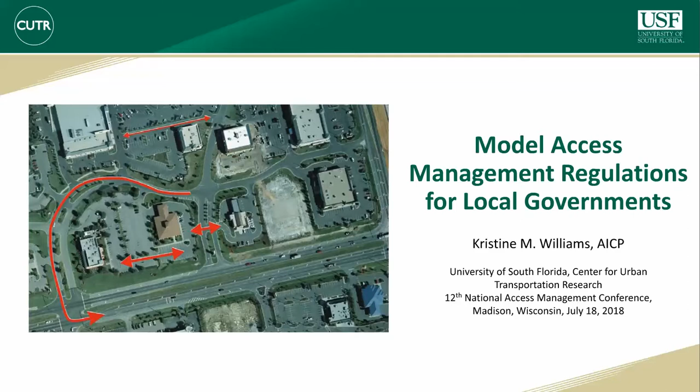And that's where my story started and kind of grew from there. So that's what I'm going to talk to you about, some of the issues and strategies. I think there's a copy of the model in the folder. It's great that Wisconsin has authority to review subdivision plats along the highway system. Florida DOT does not. But this issue of how do we get a handle on that land division activity that happens outside of the subdivision process was a big part of this.

Some of the issues we were seeing were coordination in access and development permitting, inconsistencies in requirements, inadequate review of site plans or lack of site plan review, and inconsistencies with state standards—all of those typical things you've heard about in other sessions.

If you look at some of these antiquated plats in Florida, I have a lot that you can buy in the state of Florida, right? You remember those old advertisements? A lot of this problem still exists, but new ones are being created, and these flag lot plats like you see here—they just stack them at a certain size to avoid triggering the subdivision review process, and they do it incrementally over time, and then sell them off. Of course the flag lots create these essentially shared private easements that people fight over in terms of how do we maintain them and who's going to maintain them.

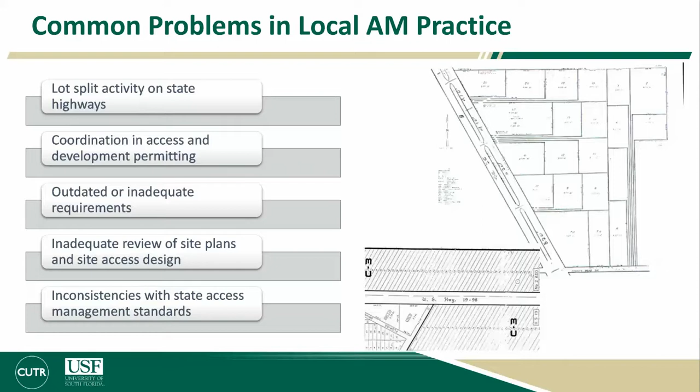And here they're all kind of leading into the median opening on a really important state highway. So ultimately what happens is the local government gets a knock on the door and says, you need to come out here and build a street. So we've got a problem in terms of those costs being shifted onto the public as a result of really poor land division activity, patterns and processes. That's what we were looking at helping DOT solve.

This is just illustrating some typical problems that are still going on. This little pork chop was put in, and this access too close to the intersection recently in my neighborhood. What should have been access to the side street is instead just access to a dumpster. Instead, they could have easily used that road. So a lot of problems are still popping up all over the place, and I have to ask myself why. We've got to get that information out, do some training, and help local agencies deal with these issues.

So in the 90s, we started the first model, which then became widely adopted. These regulations were used and applied throughout the U.S. in local governments, and also by state DOTs who picked them up, and MPOs who put them on their website.

We wanted to make this information very available to local governments, because these properties were really starting to explode. As you know, the growth in Florida, we're now the third largest state, we just exceeded the population of New York. We have 27 MPOs, so we've exploded in population and continue to do so. During the go-go 90s, you were seeing these properties all up and down U.S. Highway 98, a major evacuation route in the Florida Panhandle. You can't really see it, but it was like 100 by 500 in dimensions, and each of these individual land divisions was going to create pressure for access on the highway system.

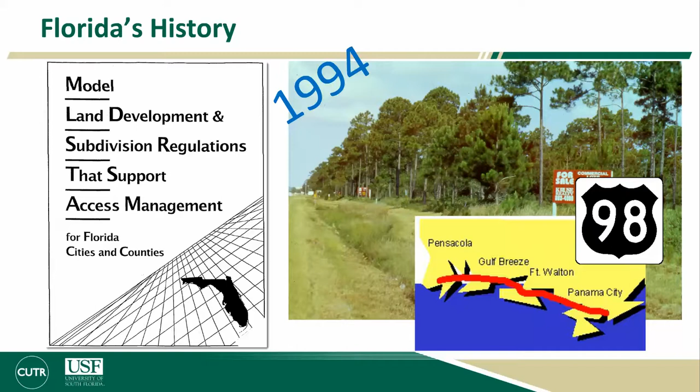One of the things Florida DOT asked us to do was go out and do some training, and we did training all up and down the Panhandle. Gary Sokolow and I, wish I had the photos of us back then. As a result, we found local governments were very supportive of access management. They were just becoming aware of what the strategies were, really appreciated the model, took it and used it, and as a result we started to see the development.

What you see now is a completed service road network along U.S. Highway 98, Okaloosa County, which took it and said, hey, we've got all this development coming in, let's use our authority under growth management to force the issue of service roads along this highway, and our concurrency requirements back then, which basically required developers to mitigate if the level of service was exceeded.

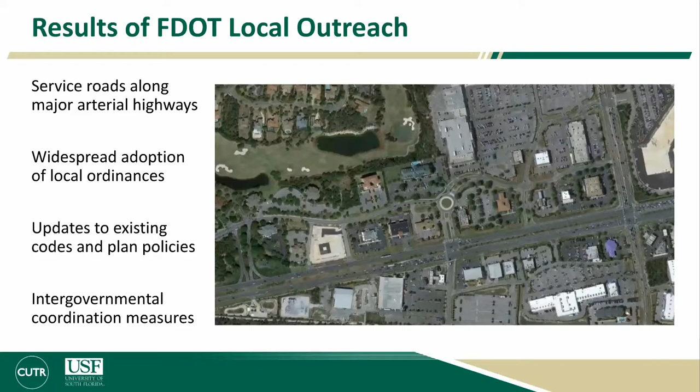We saw also across the state of Florida widespread adoption of all kinds of new updates to their existing codes and plans, because the model also has model plan policies and all kinds of information in it. Some intergovernmental coordination measures were taking place because the districts were starting to, through their permitting process, reinforce these strategies, including cross-access, interparcel cross-access on the part of the local agencies.

So what did we do to really make all this happen? That's one of the things I wanted to share with you. Once the model was done, we would go in and in various regions do an audit using kind of a checklist approach of all the access management techniques, and review or evaluate the codes and plans of the local agencies within that area and document that result.

So did they, for example, regulate connection spacing? Was it consistent with FDOT? Did they have corner clearance requirements? Did they have policies in their plan? All of that.

Then we would develop a full study report on that with recommendations of what they could change, referencing back to the model code. We did training workshops with the staff along that corridor in that region. We also did presentations to policymakers, the commissions or the MPO boards, to help them understand what we were doing and the benefits of that.

We even got some commissioners coming to our workshops when we were workshopping the changes, with some follow-up to help along the way as if they were updating something or their requirements. And that proved very, very successful.

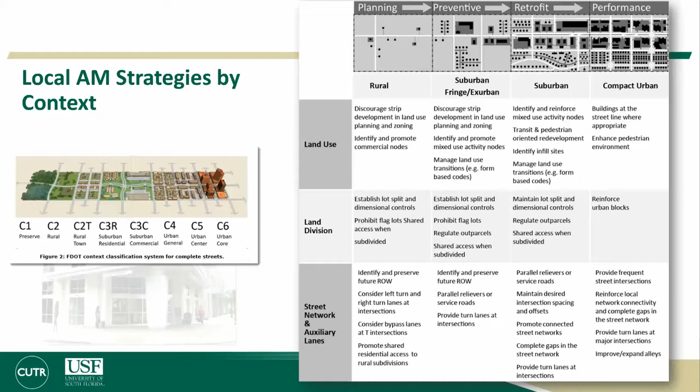For example, you could either do a category system that you assign to your entire major thoroughfare routes within your community, or you could tie your access spacing to speed limit. Those are two different approaches. One requires you to go through a planning process assigning standards based on functional class of the roadway and an access category. The other automatically applies standards based on the speed limit of the roadway, which is a little easier and simpler.

Essentially, this is a thoroughfare plan. It's saying if you have a high-level, highly controlled access roadway, that's going to be a category A. It's going to have direct access to abutting land controlled to preserve safe and efficient through movement, and we're going to have medians, separation of signals, and the street network has to be planned to support access.

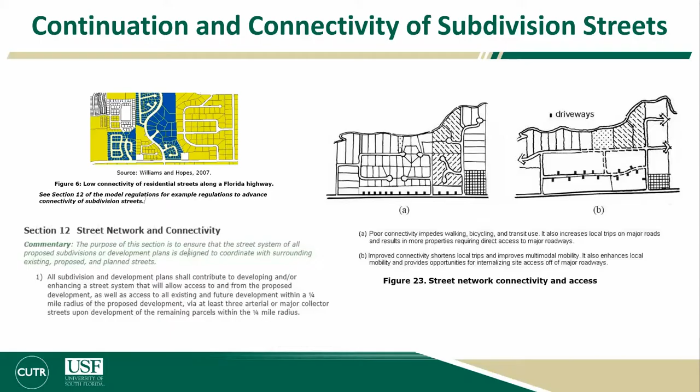Just some illustrations of those two things. And we did have in Florida - I think this is US Highway 19, but it might not be - all up and down US Highway 19 and also in Hernando County to the north of us, service roads were being put in through the use of these strategies and service road ordinances as well.

And now what's happening is DOT is going in and having certain projects where they're either realigning them and connecting them into a signal, just kind of improving upon them, because sometimes as the development process takes place, they're not always exactly where they need to be.

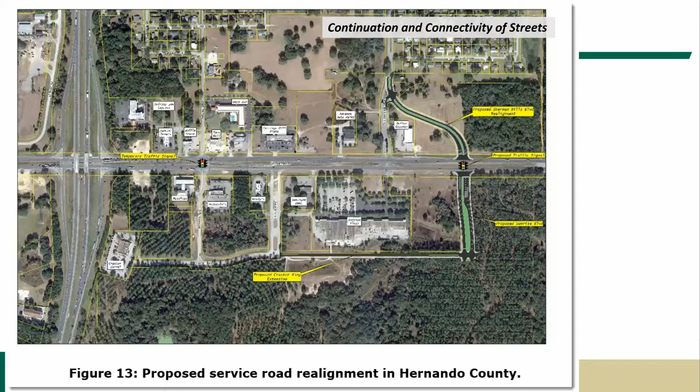After a while, the development community just took it for granted that they're going to have to put these roads in. Even where they weren't necessarily required, they were starting to put them in the network. This actually started in Hernando County before our model ordinance, but it's been moving forward much more quickly across the state.

In rural areas, another strategy that provides low cost is requiring subdivisions to be designed with shared access to and from the highway system. Low-cost alternatives to strips include working with rural owners on small concept plans, and allowing shared gravel access drives when it's only going to serve a few residences, with some simple design criteria. This strategy was taken from Rural by Design by Randall Arendt, allowing gravel with certain minimum standards. That's another example for a rural area.

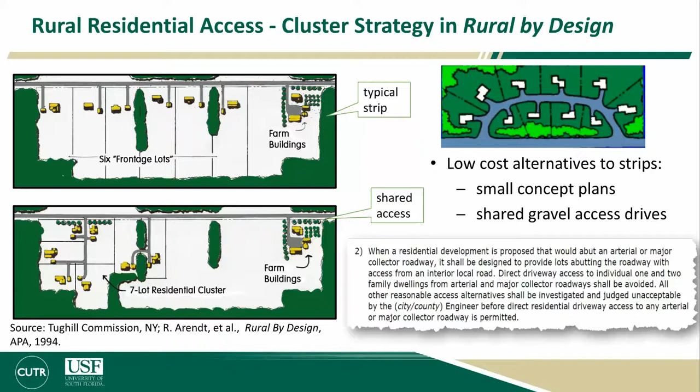Land division activity - here we see flag lots, strip lots, those long bowling alley lots that become single access cul-de-sacs, which can create emergency access problems and a lack of connectivity. So we have provisions that restrict the length of that cul-de-sac, but also any new lot splits. This example was in that US 19 overlay I mentioned: no new or additional access rights are going to be permitted for properties created as a result of lot splits after enactment of this ordinance. That stopped lot split activity in its tracks on Highway 19.

It's similar to this approach, where you could establish an overlay on a high priority corridor and permit one access per existing lot or parcel, but prevent any future connections for lots. Any new lot created subsequent to the ordinance would have to obtain access through an internal access road. So these are variations on this theme.

The other thing you'll need is a lot split review process. For small subdivisions that are not considered plats under the statute and under your definition of subdivision plat, you would adopt an ordinance that allows you to review those for consistency with standards, giving you the ability to catch those early on.

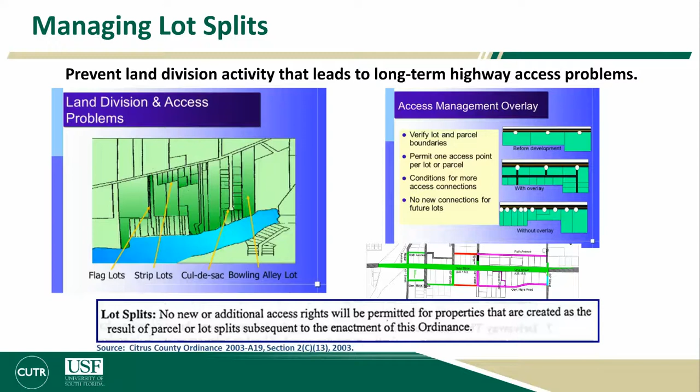Cross-access is another important issue, particularly to provide different ways to get in and out of a site that might feed into a signal, so people can make a safe left turn. Getting those cross-access agreements in place is a strategy we describe in the model. If there's a change in use or new development along these corridors, require that a cross-access easement be dedicated - the owner has to record it with the deed, so it runs with the property, not the owner. If temporary access is needed, provide for that through an agreement process, with joint maintenance agreements to prorate maintenance costs across the cross-access corridor, and provide for exceptions where it simply proves impractical - incompatible land uses or other site-related issues. Establishing that sort of cross-access ordinance is another strategy we describe in detail, and this illustrates an example.

These are two major shopping centers. They have cross-access across the front and a limited number of driveway access points. One thing that's missing is the pedestrian circulation system, which the model now also addresses - bicycle, pedestrian, and transit access, near side, far side, transit guidelines, bus stop guidelines. But here you can see it works really well. We have really good circulation. Trucks can also come in from this access, go around the back of the property - there's parking and loading docks back here, and they can get back out on this major highway.

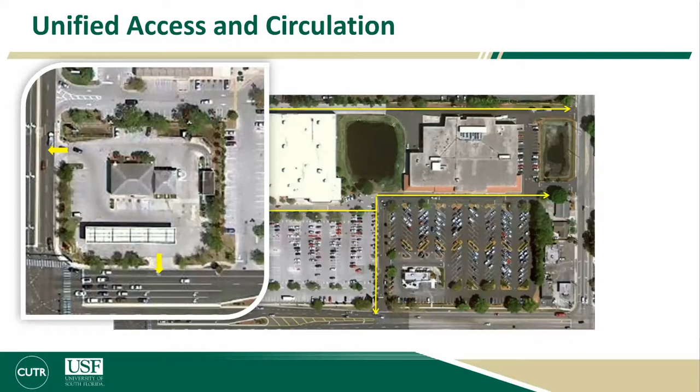As far as the sales side of it to property owners themselves, this gas station would do a lot more business if it had access into the Target and Publix shopping center than it does being constrained on that corner with just two access points.

Out-parcel access is another issue where you saw the value of these things in some of the earlier presentations, or if you weren't here the other day, they certainly are very high value to the developer of that property.

One of the things that can be done to avoid these being split off, sold or leased separately—and then coming in individually with an access permit—is to regulate that entire site under common ownership, or part of a phased development plan, or assembled for development purposes, as one property for access management purposes, with this simple set of requirements.

Basically, the number of connections permitted will be the minimum number necessary to provide reasonable access to the site, and so on. All access to out-parcels has to be internalized using the shared circulation system. Section 11 talks about that, as well as corner clearance.

This is an example from the Cape Coral area where they were using these strategies along Pine Island Road.

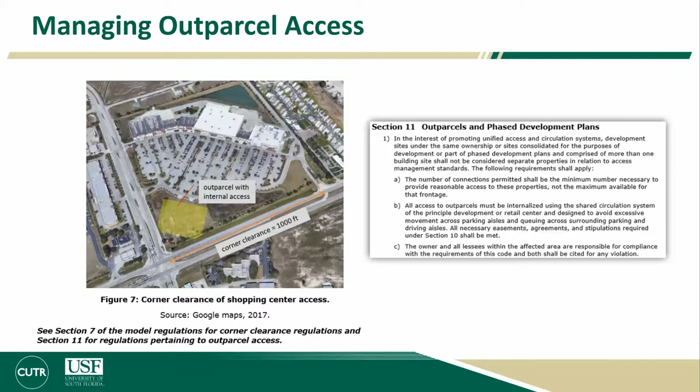Pedestrian access—I mentioned this. Here's a driveway into a grocery store near a mobile home park. People can't walk into that grocery store safely because basically they're walking in a driveway, and there's no sidewalk, no direct pedestrian access for them into that grocery store.

As we're trying to promote active lifestyles, public health, and pedestrian-walkable environments, having attention to that in the access and traffic impact study, in the review of developments, and in driveway permitting is an important strategy. This talks about different variations of how you do pedestrian access.

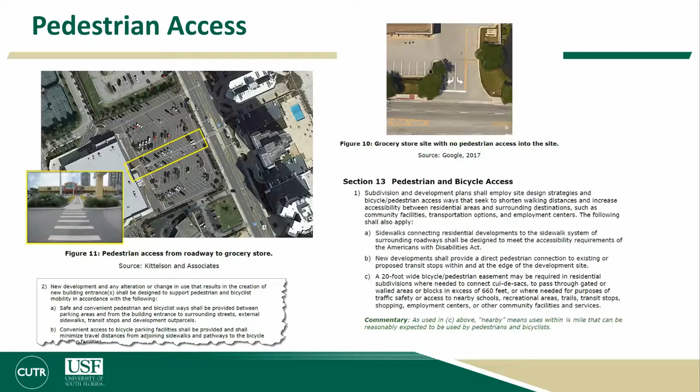The other side of it is that simply shifting those businesses to the sidewalk is a really good pedestrian access management strategy, because then the pedestrian can access that business directly without walking through a parking lot. Transit buses can drop them off and they can get right in.

Even for a gas station or a convenience store like a Circle K, it really makes a huge difference without sacrificing any functionality—in fact it actually improves corner clearance and moves driveway access points further away from the corner. This is just an illustration of that.

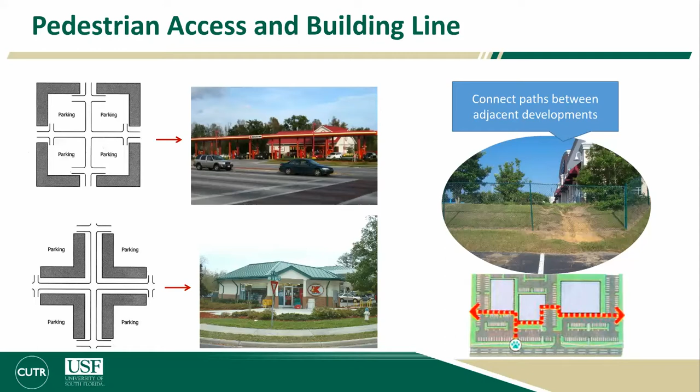Also, having adjacent suburban developments knit together rather than blocking them off, and allowing some break in the buffers on the side of the businesses in the zoning, so that they can put pedestrian walkways through.

So that's the main issue and some of the strategies, but what I want to do is point out that if you go to our website—here's how you get there.

It's a little convoluted, but you go to CUTR, USF.edu, pick research programs, then corridor management, and completed reports. All of these documents are on that site, including that brochure and the model access management multimodal district regulations.

There's also bypass material—all kinds of bypass materials useful for educating the public and businesses on the impacts of a bypass, along with land use, development, and access management strategies communities can use, plus corridor preservation practices and webcasts on these topics.

So I won't belabor it any further, and I'm going to stop there. Happy to answer any questions.

Questions for Kristine?